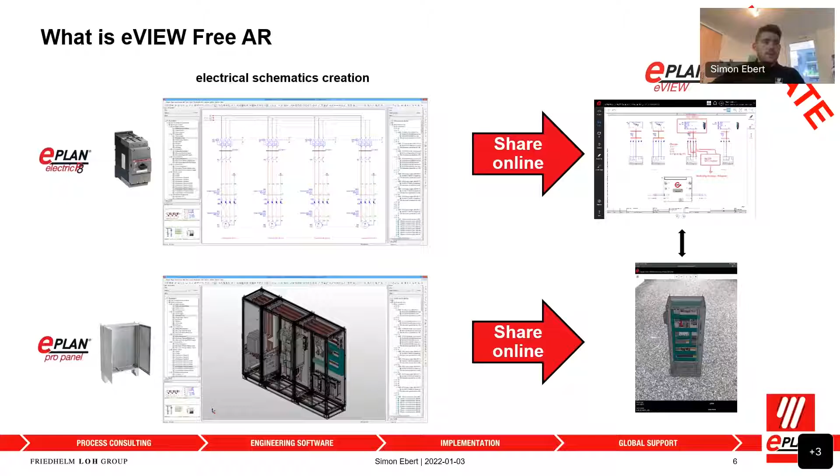This is an interactive 3D model. What it does is it lets you interact, select components, hide components, and all the stuff that wasn't previously possible in our whole eVIEW technology. Of course, everything that we learned from the AR technology will also be reintroduced into the eVIEW 3D viewer in just the future. So what we learned from AR, we also will apply to our whole cloud platform in just a couple of months.

What do you need to do to use eVIEW AR? As I said, we already have this 3D data available, so setting up eVIEW AR is quite simple. All you need to do is install one add-on into your Pro Panel, which in the near future won't be needed anymore since we'll include it into the cloud backbone. But currently, and for the next months, it will be needed as the first step.

After that, you simply upload the project like you do with your current cloud plugin, and then you grant access rights to everybody who should see the project. We are working in our whole cloud platform with user management from EPLAN behind it, so nobody who's not allowed to see your data will see it. You have full access to the user management to ensure only people with access can see the data.

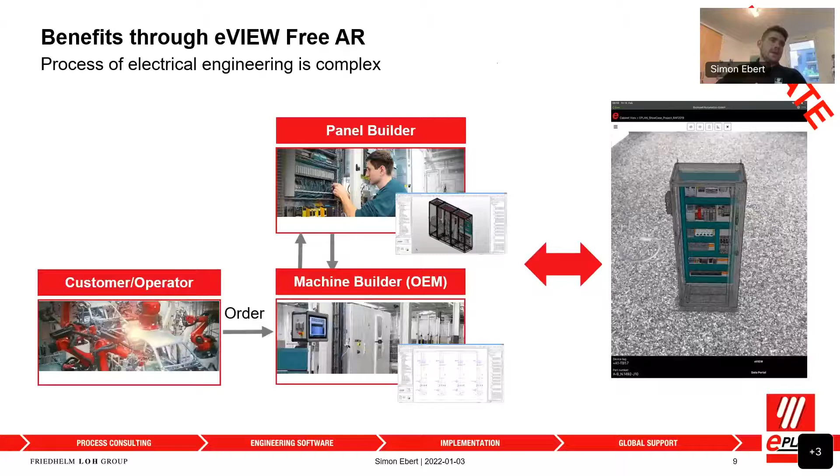And that's the whole setup - quite simple, 3 steps. I'm just going to quickly skip over why you should use eVIEW AR since I talked a lot about this previously, and I think I'm just directly going to jump into the live demo of what I did, to give you some better insights.

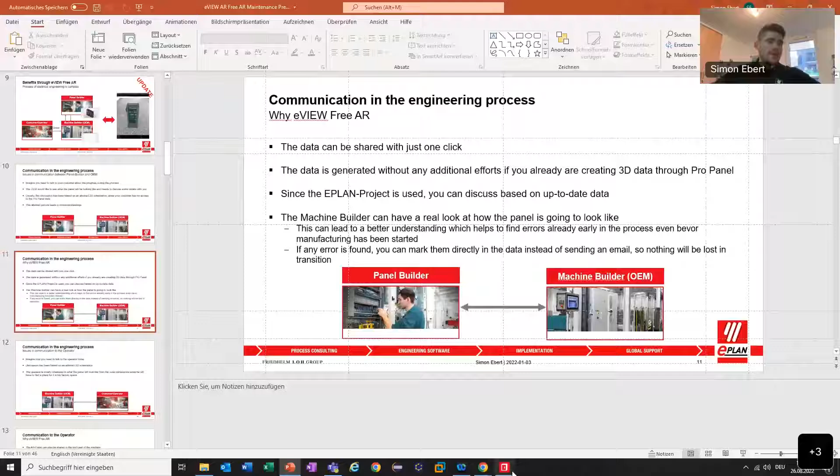What I did to start the live demo is I opened here my Pro Panel. You should be able to see it now. And here I have my project - it's a project we currently have in the building phase, also at the University of Aachen, so it's a real cabinet right here. And here I have my Pro Panel data.

What I do is I open my AR Services add-on and simply select the project in the page navigator. Here you can see I'm already logged into my ePulse organization. I have here my user, all my organizations, and if need be, I can also switch my organization right here.

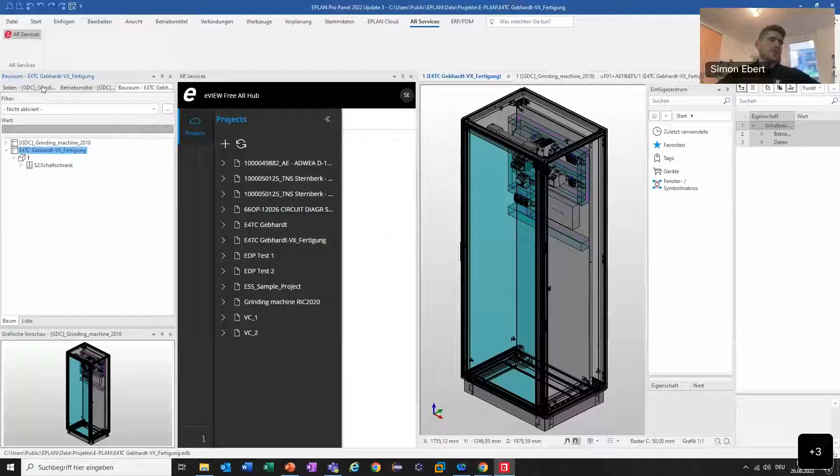What I want to do, if I want to upload the project, is just select the project in Page Navigator, right here. Then I click plus, and this opens a context menu where I can choose where to upload the project in the cloud context. I can put a comment and click OK.

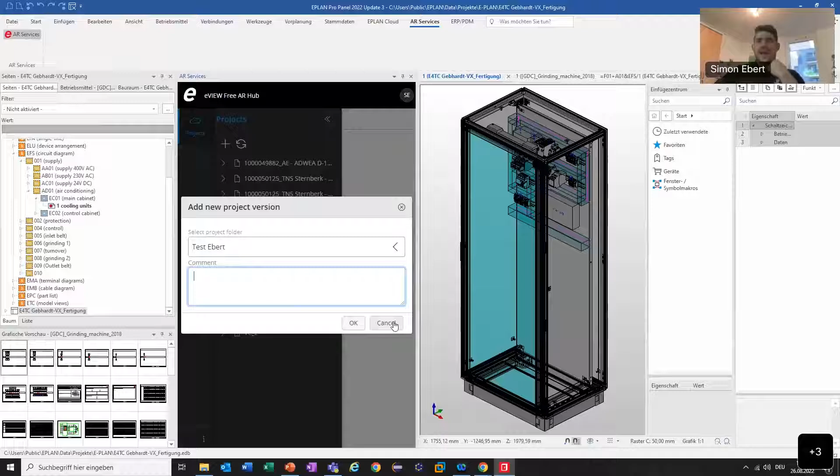Of course, in preparation for our meeting, I already did that for today. It takes 2 or 3 minutes, so I'm going to quickly skip over that part. Just so you know, it takes 2 or 3 minutes to generate the whole model and then upload it, and due to it being a 3D model, it might take up to 5 to 10 minutes. But in this case, the project is already here.

What I'm greeted with after the project has been uploaded is a project overview. This is quite similar to the view you already know from eVIEW, where you open your 2D schematics. I also have this available right here - if I open my cloud plugin, I could go into eVIEW, go into my redlining, greenlinings, and into the schematics in the eVIEW viewer.

So here I have now 2 options, at least when I'm on the cabinet. The first one is free AR, the topic we just talked about. Already I can see here a preview of the layout space that I've just uploaded, and I can, of course, hide the front door and interact with this.

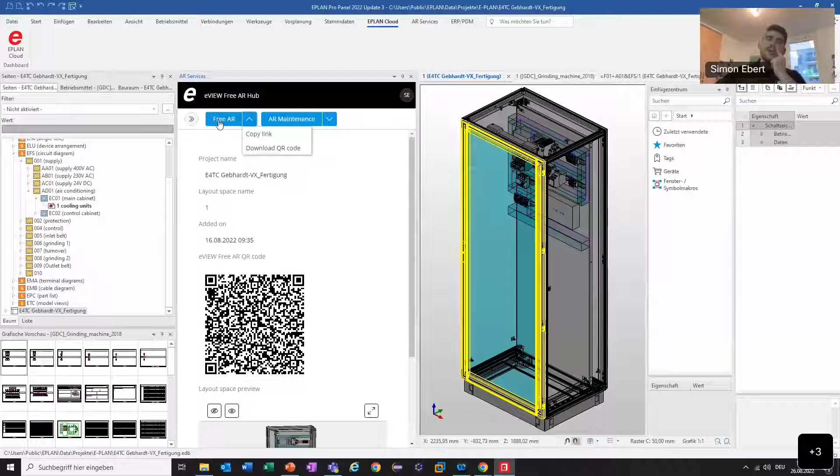And what I see here is a QR code. This QR code is basically just a link, and it's also accessible for download via this button here on the top side, the free AR button. Since it's a link, I can also copy the link.

It is posted into my clipboard, and now if I would like to share it with a colleague, I could either send him the QR code as a picture, or send it via email, which is what I'm going to do right now, with an email to myself. Via Outlook, I can share the link as well as the QR code. So I could go into my emails, create a new email to myself, and you see if I press Control V right now, it pastes the link that is directly connected to this very project.

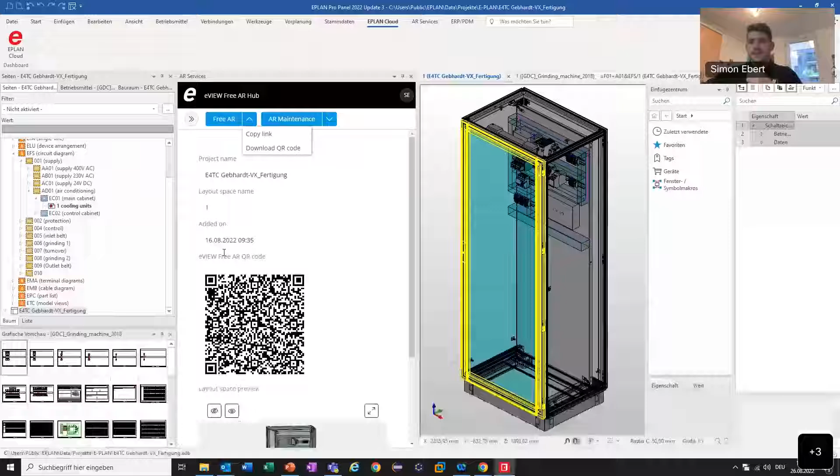What does this help me? This link I can access directly via my tablet. I'm going to switch now to the view of my tablet, since I want to show you how I can use eVIEW AR on a handheld device.

Can I ask you a quick question - whenever someone clicks on that, what capabilities do they have? Just viewing? Yeah, it's just viewing. And also, of course, you'll need the access rights in eVIEW and to authenticate yourself with your login of the eVIEW page itself.

Okay, Simon, how we display this AR, is that tablet only? Do we have wearables that we can use? What's our limitations there, if any?

So for AR, currently we are focusing on handheld devices. For this, I have a page that I'll refer to in the presentation where you can find all the prerequisites on the tablet. So of course you can't use it with a 15-euro tablet, but most actual tablets, mobile phones, and handheld devices currently can access the app.

I just changed the presentation mode over to the tablet, so I'm thinking that's how you have to have it in order to show something. Is that correct? Okay, so I'll have to reshare my screen if I do it correctly. It's the limitations of WebEx. Yeah, no issue at all.

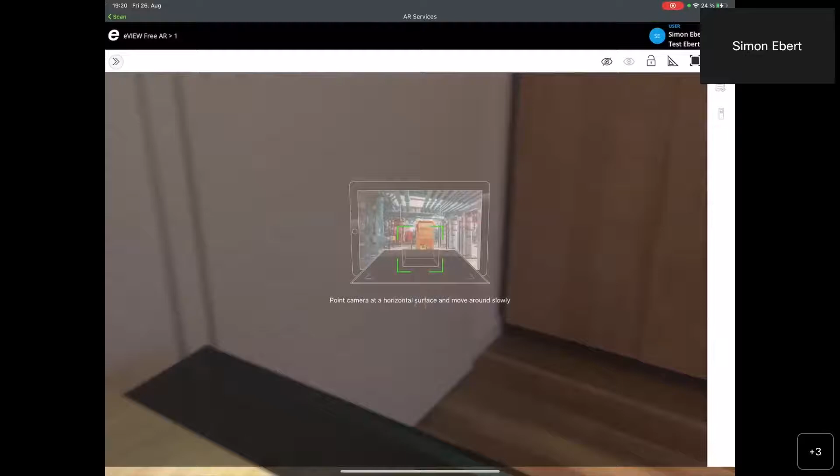After I've authenticated myself, now it tells me to point my camera at a horizontal surface to be able to place down the cabinet. I'm going to put that right here in front of my big cabinet that's in the background. And what you can see is right now in my room, I have the real size cabinet that I just had as a Pro Panel project now placed in my room.

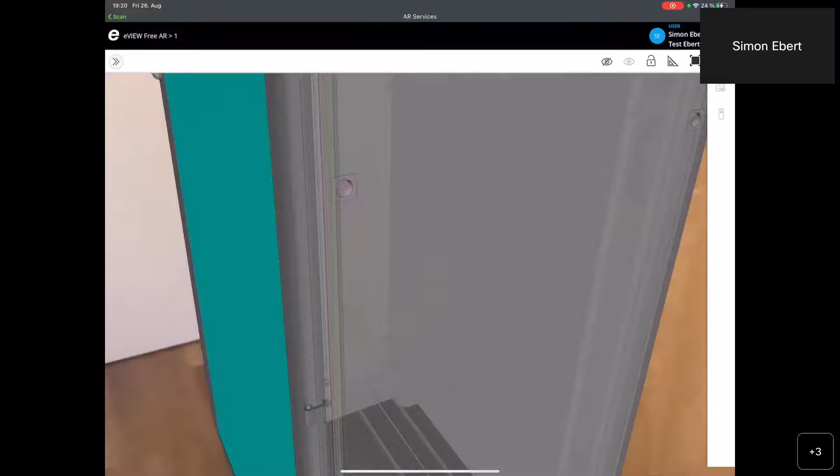Of course, I can more or less walk around it. And also, since it's AR and there's no collision with digital things, I can walk inside of the cabinet and view details on the components and stuff like that.

In case I don't like the size of the cabinet or the positioning, now with just the move of one finger, I can reposition the cabinet to the exact position I want to have it.

So let's say now I want to align it with this door on the background. I can simply drag it there with just one finger. And let's say now I want to place it sideways. With two fingers, I can rotate the cabinet.

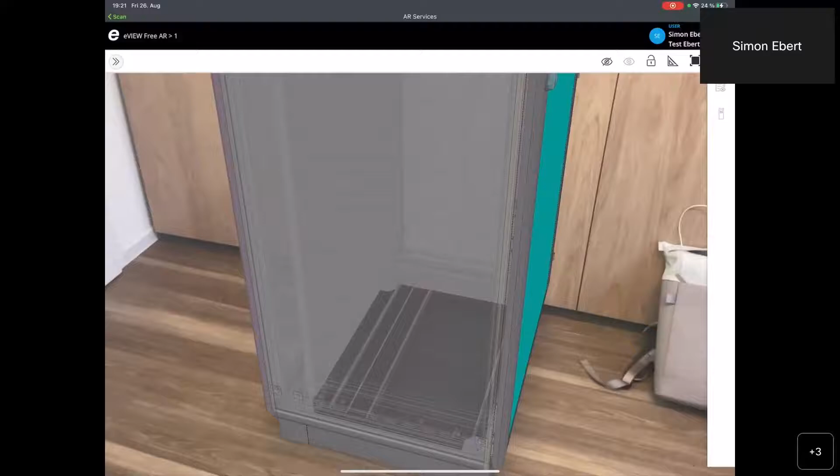I'm going to switch it back to the original position with the rectangle button on the top right, not the lock button, but the one below. This snaps the cabinet back to its original size.

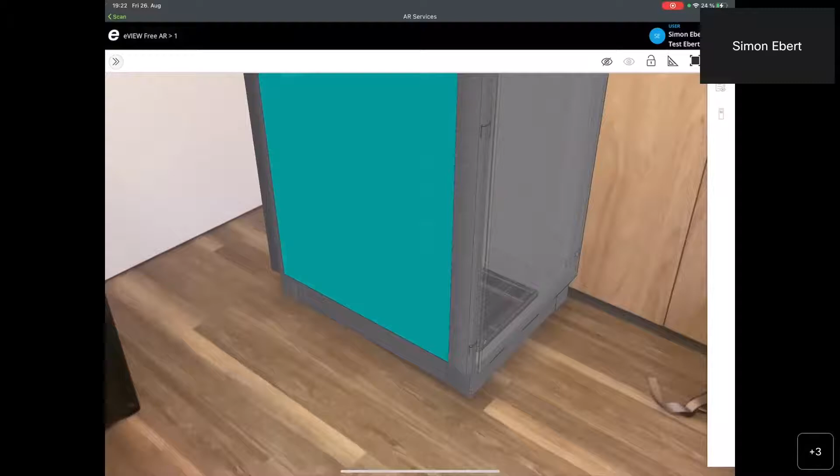As you can see, the cabinet is a little higher than me. Since I'm about 6 feet tall, and the cabinet has a size of 2 meters, and German doors are also around 2 meters, the cabinet has been placed in the exact real size. This is due to the application recognizing the size of the room I'm in, and being able, from the Pro Panel data, to accurately place the cabinet at real size. This will always be done whenever I place down a cabinet.

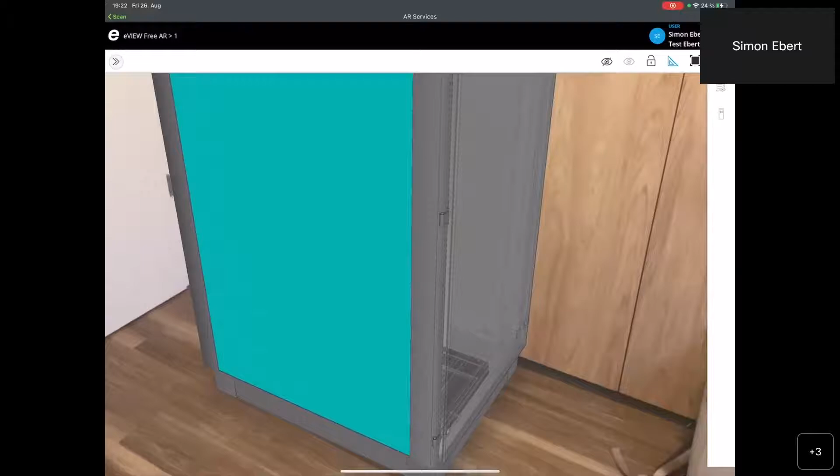But let's say I want to have a meeting and look at the whole cabinet without moving 5 or 6 feet backwards. What I can do is enable the ruler button on the top right corner, and now it's highlighted in blue. This enables me to use the function we all know from mobile devices, using two fingers to resize the cabinet right now. So now you can see I resized it smaller so I can properly see the whole cabinet and work with it.

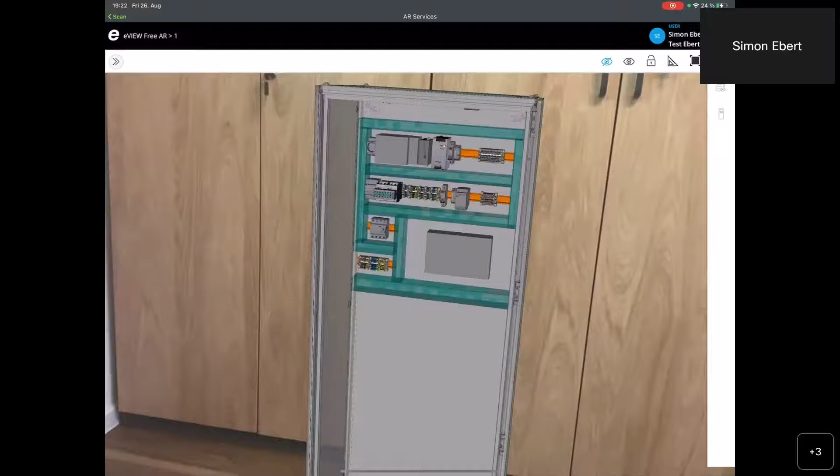After deactivating this function, let's say I want to access the insides of the component. So I'm going to switch into hiding mode using the eye-with-a-dash-through button and activate the function. Now, by just clicking the front door one time, it's hidden. You can see again I have access to all the components without needing to walk inside the cabinet. Here I now have some additional options.

If I want to find out what a component's name is, or its main function, I can simply select it and it will be highlighted in red. The rest of the model goes into transparent mode. And you see now on the top right side, two arrow buttons are enabled.

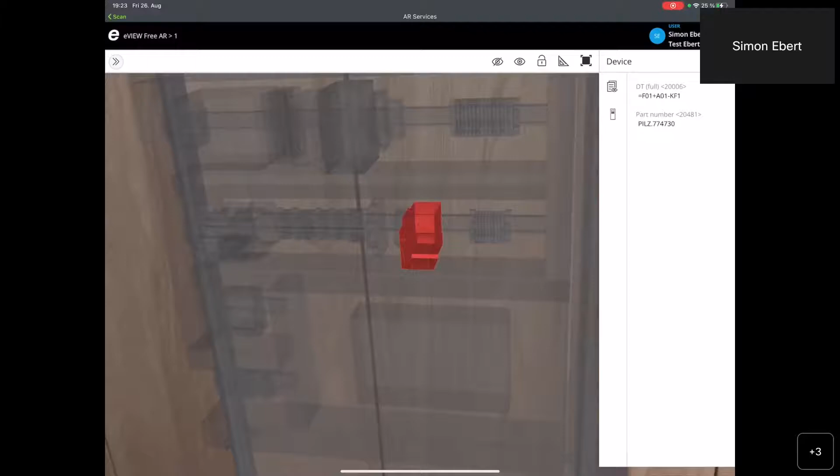When I pop it out, I can see all the information about the device I just selected. I can see the device tag, which is my motor protection switch in this case, and a part number. Since this data came from our Pro Panel, and Pro Panel is connected to the EDP, with one click on the EDP button I can pop out on the left side all the information directly from the EPLAN data portal, with the ability to download all the data sheets and find information about this component.

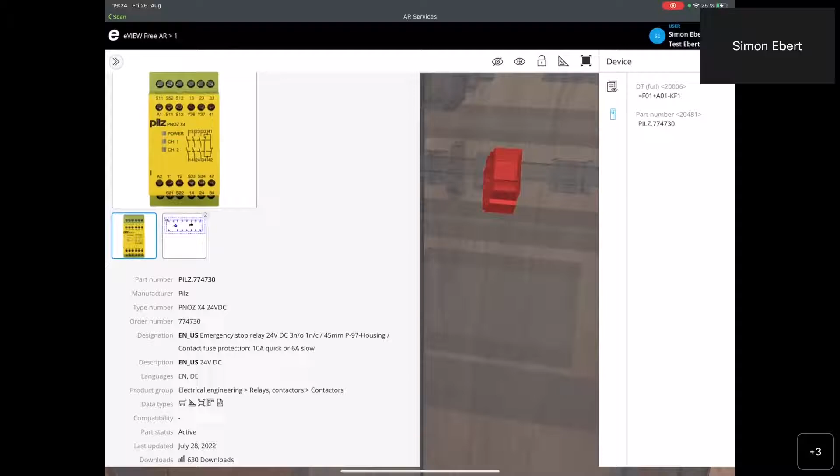Also, since we're working with the EPLAN platform, if I jump back, I can click on the eVIEW button you might recognize. If I do that, I'm redirected into my schematics inside eVIEW, directly to the page where the main function of this component is located. You can see I've been directed to page 42 of 57, where the main function of the component is located.

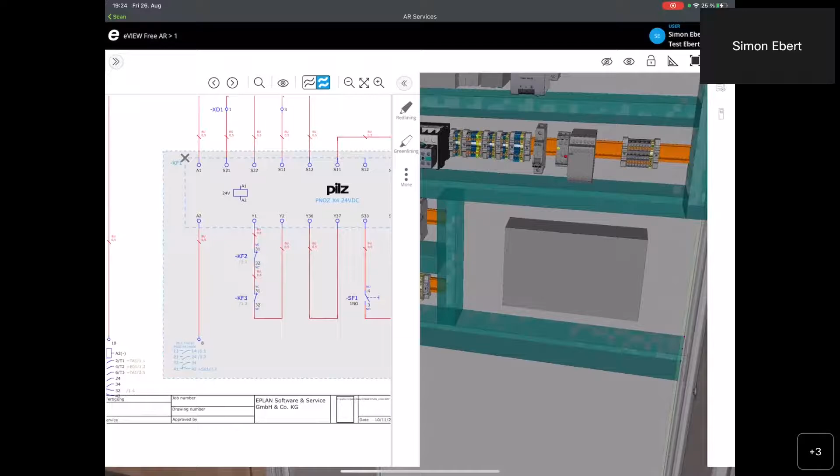Here I can find out how this component is connected and jump to any other component. Of course, now thinking about my AC example, I could also select the component and say, okay, this is now an AC, or I don't like this component.

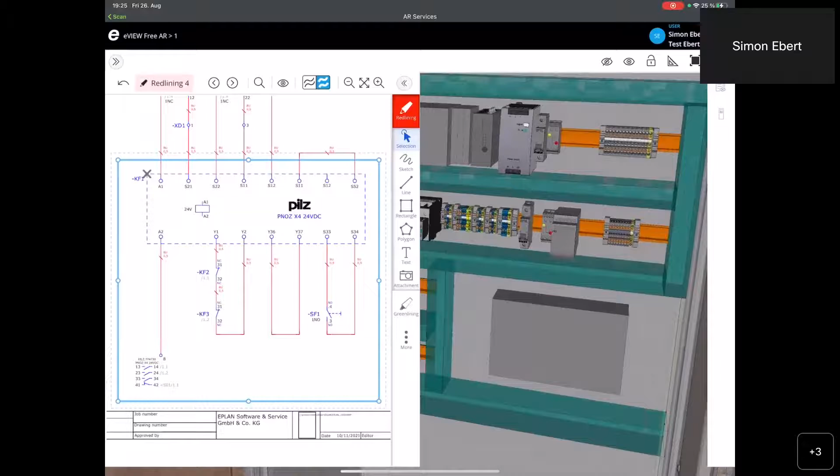So I can place down a redlining via a rectangle and say, I want to also attach a picture explaining why I don't like it, and insert text, for example, to give feedback to the engineer. This way the engineer will be notified in his EPLAN project, just like with the normal redlining of the normal eVIEW, since it's the very same function. So this redlining is also visible on my Pro Panel as well as in my eVIEW on my desktop PC.

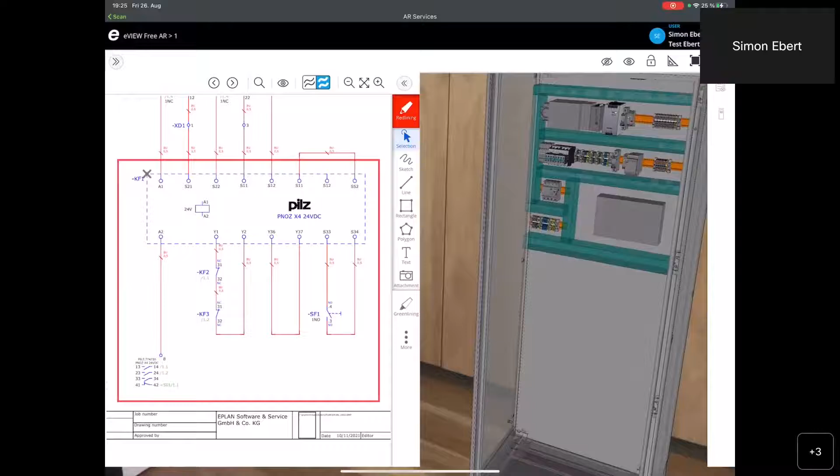This is the first iteration of eVIEW AR. I'm going to jump back to my computer and stop the presentation from my tablet to show you the second iteration we've just developed, which is currently in beta and will come within the next year, most probably.

Now Simon, while you're switching over, you got my wheels spinning as you started showing everything, and I'm thinking use cases. If I am a switchgear manufacturer using Pro Panel, can my customer lay down multiple panels in one room at a single time to view how that room would look before any manufacturing is actually done?

Yes and no. Of course, he can place down multiple cabinets, but they need to be inside of one Pro Panel project and inside of one building space in Pro Panel.

So whenever we're working in a Pro Panel context - let me restart my screen sharing from my desktop as a remark. Am I good to go for that? Yes, you should be good. Okay, I'm going to share the screen now.

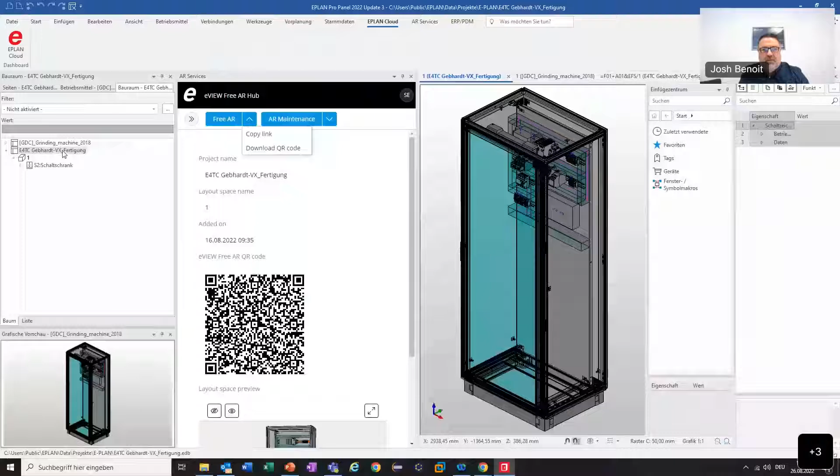Whatever I'm able to place down needs to be inside of one building space here in Pro Panel, and I can lay down whatever is in that building space in this case. Currently we don't have the possibility to display multiple building spaces next to each other, since each one has to be displayed on its own and needs to be able to access the data.

Now that we have that, you already saw I have a second button here called AR maintenance. We thought about not only using this data in an engineering process, but also this data, as we just saw, might be very handy in a maintenance process.

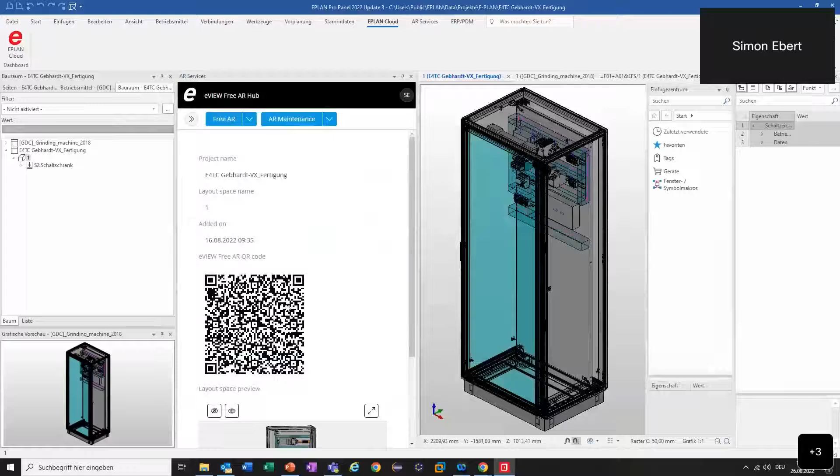What I can do via this button is download a different QR code. If I click here on download, I get a context menu that asks me where I want to save the QR code. You can already see it's a PDF document, and I'm going to show this document to you in just a second.

Let me switch to my desktop and to the data set I just created. So it's that one right here, and this is how the QR code looks. This is an A4 page. What can I do with that?

This QR code is intended to be placed on the front door of the cabinet itself. So I'm going to print this out. Whenever I print this out, I can place it on my cabinet, and this way I can overlay the AR data with the real cabinet itself.

Of course, unfortunately, since I'm stuck in home office and it's already quite late in Germany, I'm not in the office space anymore and don't have a real cabinet available at my home. However, for the upcoming presentation, let's just imagine my computer is a cabinet, and I want to align the top bottom left corner of my screen with the bottom left corner of the cabinet itself.

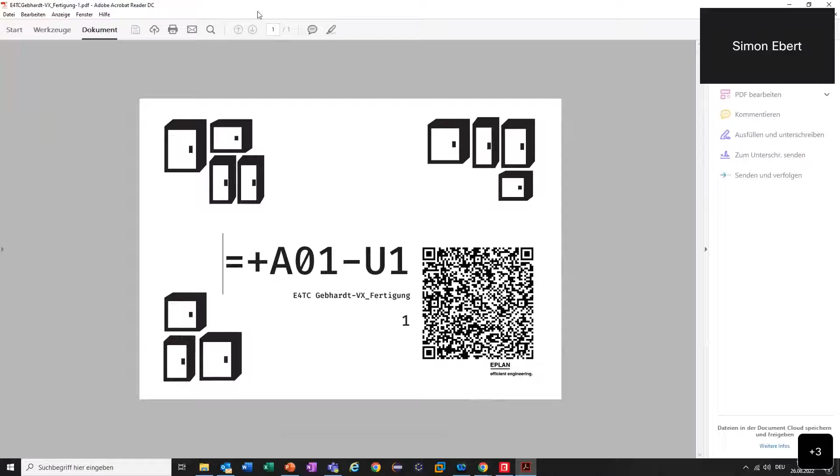Just for demonstration purposes, but it works the same way with a real cabinet. So what I'm going to do now is jump back from this screen to my tablet presentation, just to give you an overview of what I'm going to see now on my cabinet itself. One second, I need to switch to the tablet - it takes a while for me.

Let me ask you a question while you're doing that. Whenever you were showing how you could leave comments earlier - those comments that you leave, the person that has that QR code that opens that link up and looks into it - can anyone leave a comment, or is it just someone that is on the team?

It's just people that are on the team and have access to the data. Everything I do in this context is linked to my ePulse user, so whatever I'm doing, you'll see the comment was left by me, at this time and in this context. Everything I do inside the application is linked to my ePulse user and can also be traced back to this very user.

Yeah, I think security is a big question for a lot of what we do. So if anyone has access to it and they could leave comments, that would be something we probably wouldn't want. I just wanted to make that clarification.

Yeah, of course. So the access is always directly via the EPLAN platform or the EPLAN cloud. Whenever somebody has access, it has to be verified that he has access, and he has to have a certain password length.

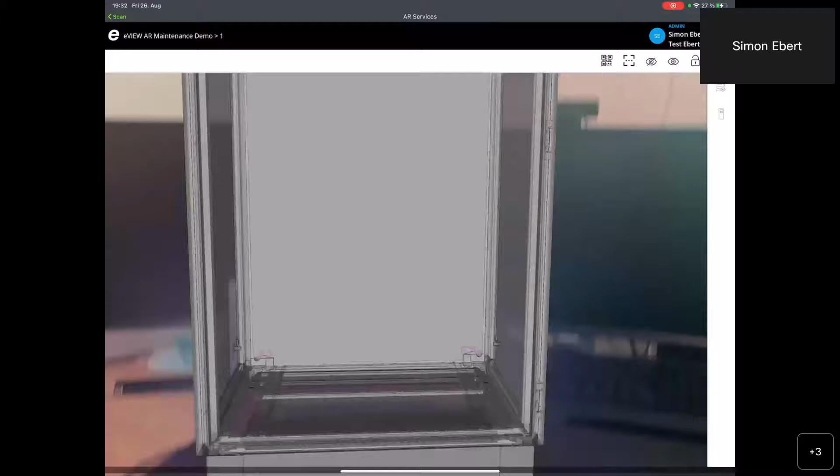Let me hide the front door again so we have a better view of what's going on. Now let's imagine that the bottom left corner of my cabinet would be the screen of my laptop. Since I just printed out the QR code and placed it somewhere on the door of the cabinet, I now need to align the QR code, since my application doesn't know automatically where exactly the QR code is.

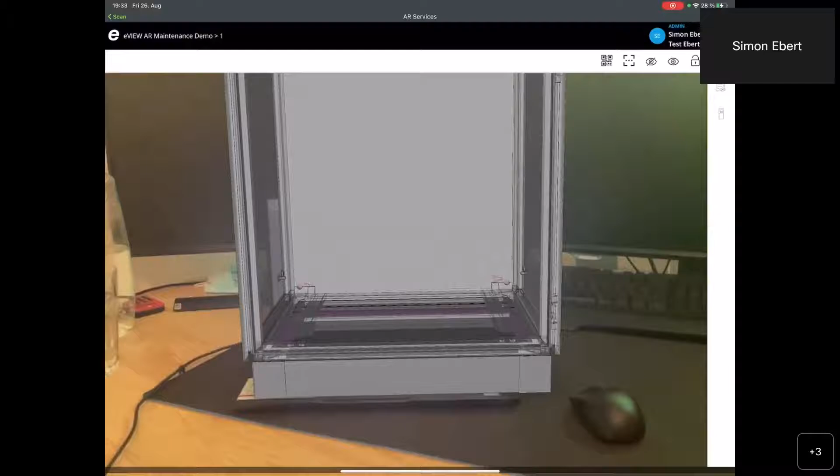For this, with AR maintenance, I have a function on the top right side again, where most of the functions are located, with this rectangle with the 3 dots in it. What that does is enable me to choose the location of the QR code on the cabinet.

So you can see I'll freeze my screen now through the lock button. What it enables me to do is choose the size of the sticker, since it's an A4 page, but in some cases there might be a border on the paper and stuff like that, so you can directly align the real size of the cabinet exactly to the size of your cabinet, and we have a little bit of wiggle room for how big the A4 page was printed.

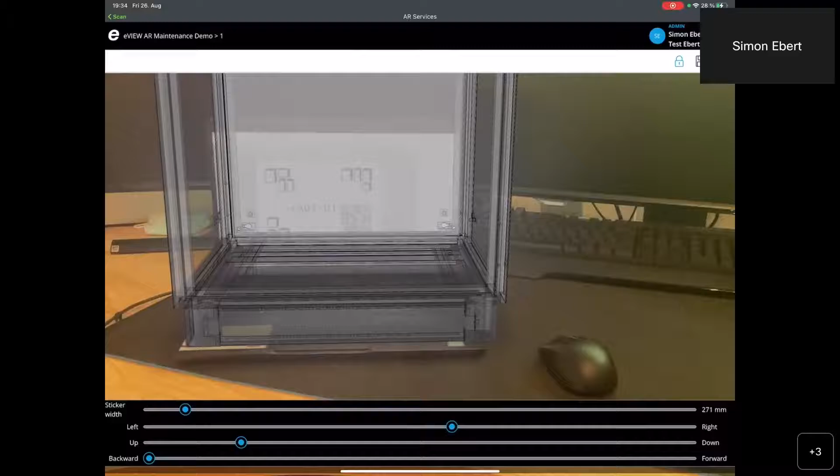Additionally, I can move the cabinet here to the left and right, and this way align the cabinet directly with the left border of my PC screen. I'm going to need to make it a little bigger. Now I'm going to align it to the left side of my screen. Also I can say my cabinet is a little bit lower, and let's say it's now a little bit more forward. This way I would align the QR code with the real cabinet behind it.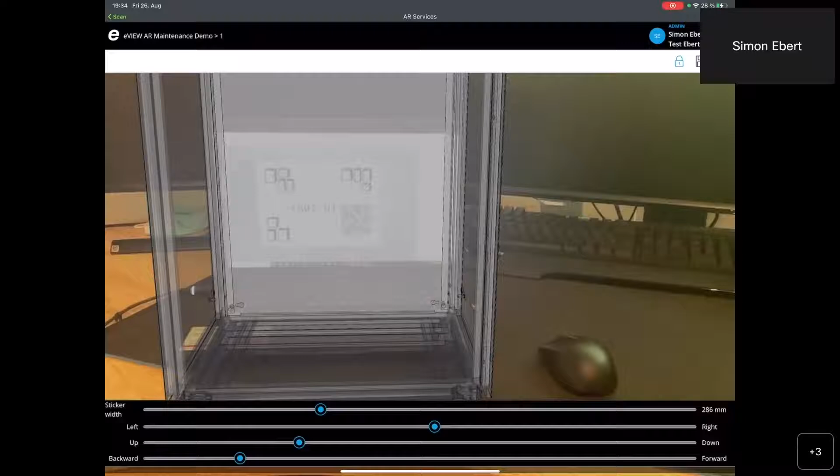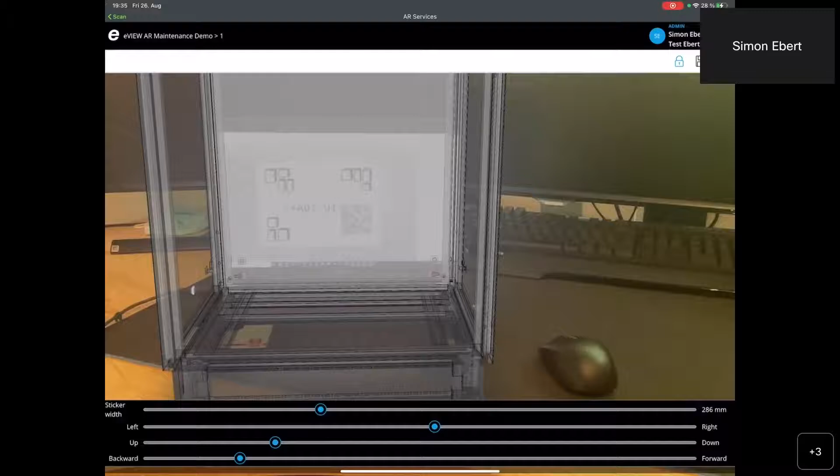Of course, I wouldn't see my laptop screen then, but the real cabinet, since everything is transparent and I'd be standing in front of a real cabinet right now. Now let's say I've printed it out and the sticker is placed on the cabinet. I don't want to go through this finicky process of aligning the cabinet with my AR model every time, that's why there's a save button on the top right. When I click that, in this case I'm not going to since it's a real cabinet at a real factory space I just fiddled with, it saves the position of the QR code itself inside of our cloud platform. So whenever somebody now accesses the cabinet, it will be placed at the very same position based on the position of the QR code.

So whenever I go to the QR code now and scan it, the cabinet will be in front of the real cabinet itself.

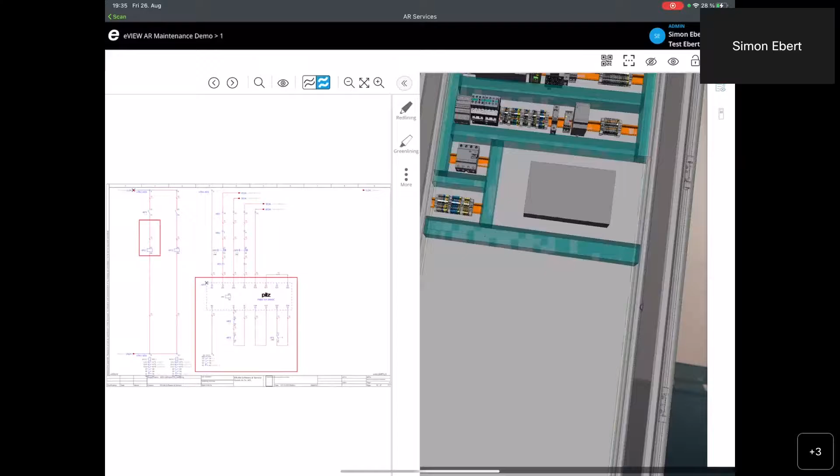Additionally, with eVIEW AR maintenance, I have some additional functions. So what we already saw is I can jump into my 2D schematics and say, now I want to find something out, and I can place down a red line.

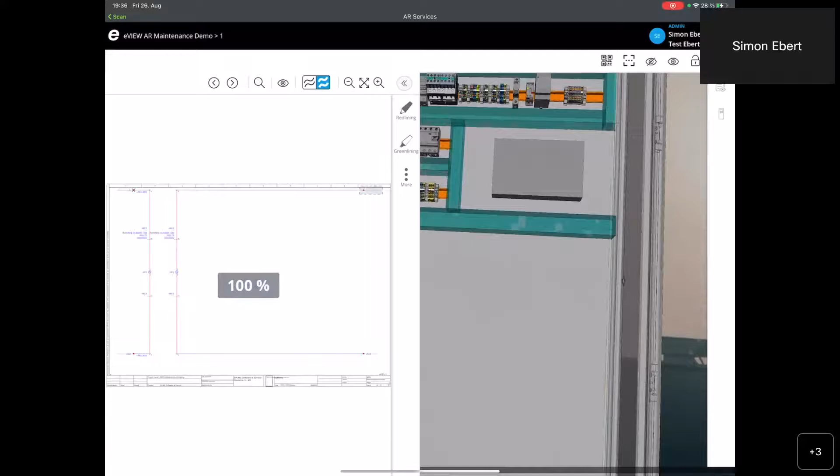Whenever I'm using eVIEW AR maintenance, I can also jump to a different page since I know from which component I came. I want to locate my KF2, since I have a maintenance case and realized no current is coming to my motor protection switch, and I want to locate this very component. I can select the component itself, and whenever I have AR maintenance enabled, I can click on more and say open in AR.

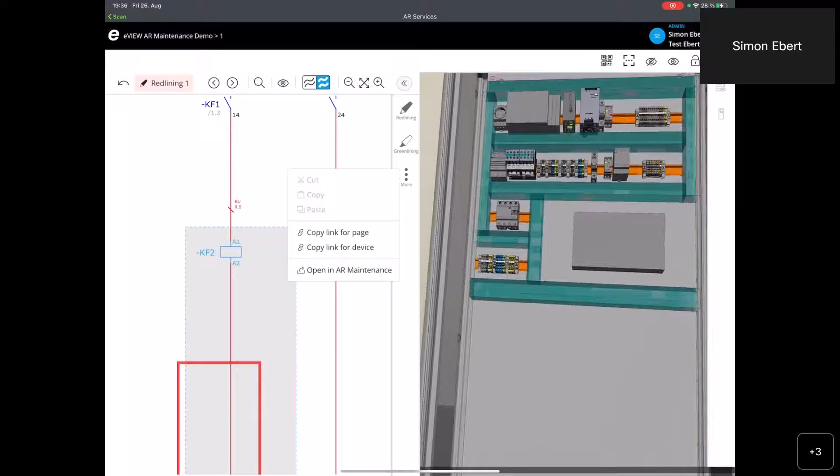This highlights the component directly in my 3D spacing, the other way around. This way I can locate this component and say, okay, the problem is not here. So I'm going to jump back into my 2D schematics.

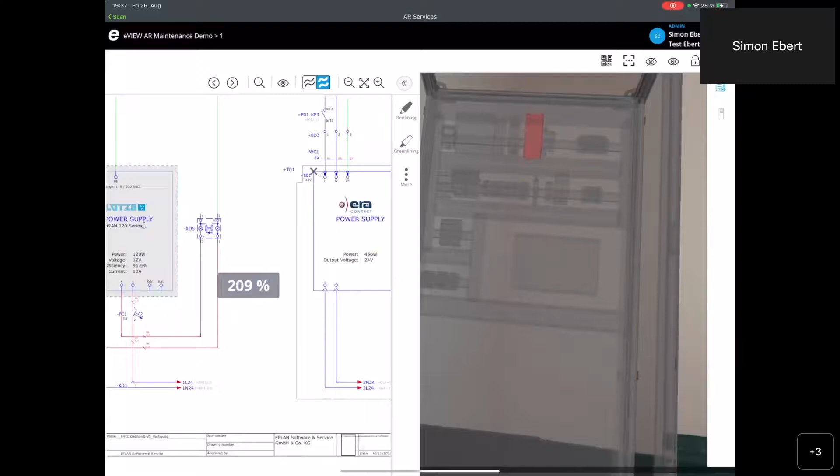This also is not receiving any current in my example. So I'm going to locate, let's say, the power supply, and I want to locate that one. Again I can click on more, say open in AR, and the power supply of this component that I just came to through my connections is highlighted in red for me.

This way, I have a really easy way to do maintenance processes with the help of AR. This way, I can really easily locate components inside the cabinet.

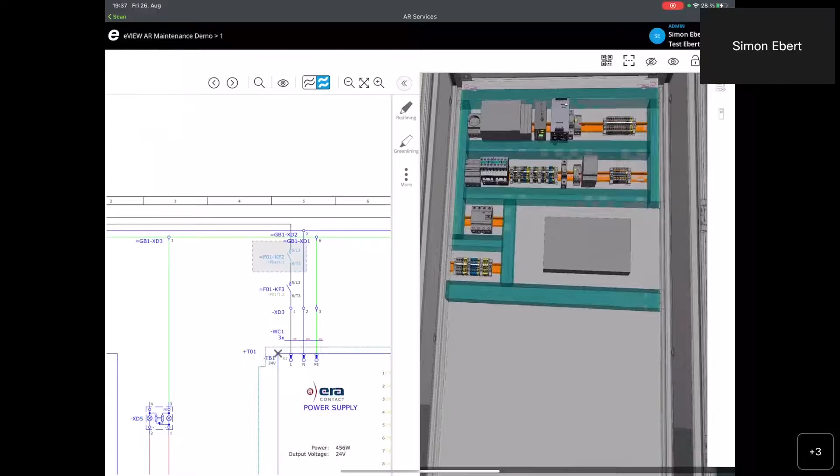And also, if EPLAN or EDP information is available, I can pop out my EDP information on the right side. For this I just need to switch to a component that is actually in EDP. So for this one, I'm able to see all my data sets and download the page to see what replacement part I can use, or what accessories on the part are able to be used to repair the component itself.

And Simon, I believe you mentioned there's futuristic talk of our customers using routing in production, that we may be able to highlight the entire circuit down the road. Is that true? Did I hear that correctly yesterday?

Yeah, that's correct. So in the current AR model, and that's the issue with the presentation I have possible right now, there's two basic issues. The first one, I'm just going to mitigate by showing you some pictures of what it looks like in a production space. You want me to change your presentation mode to the other one? Yeah, please change back to my computer. So that I can share what it will be looking like on a computer itself, on a project itself, on a real cabinet.

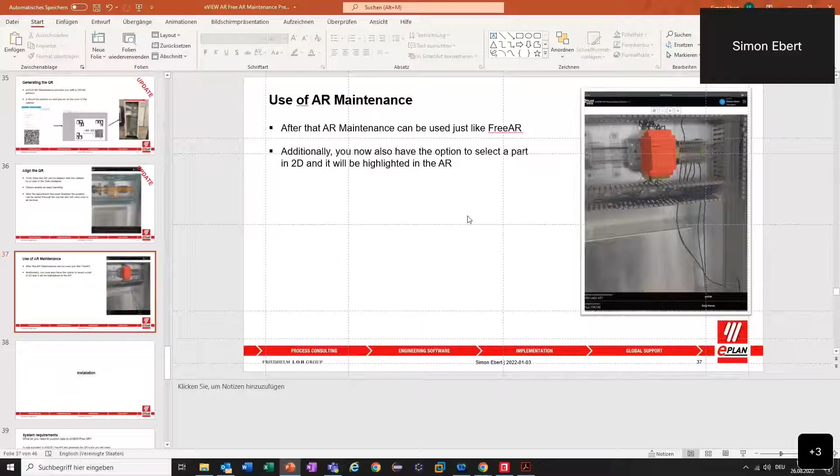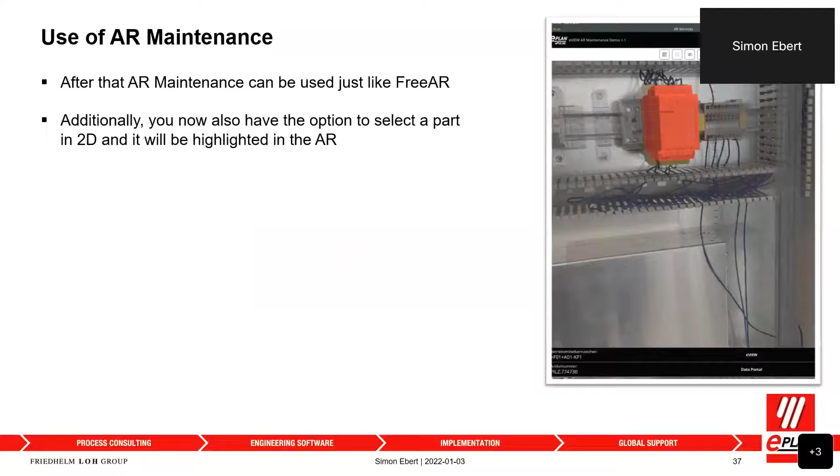Are they going to send you a cabinet? Seriously? Yeah, to be honest, I'm going to get a Rittal panel in the near future into my home office space to be able to present in the evenings some things to some customers, especially since we're really limited on working in the German space right now. Whenever I want to present to you guys in the US, I need to be able to do it from home as well, since I think our office closes at 7 in the evening.

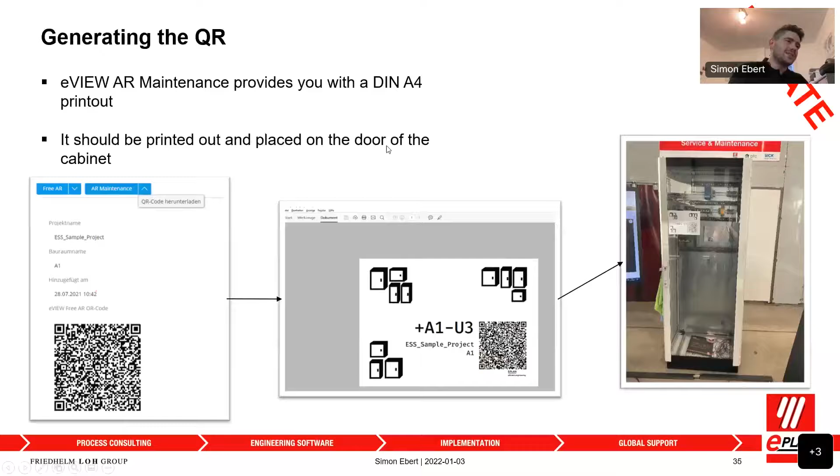So yeah, this way I'm also able to show stuff like this in the evening. So again, here's some pictures for you of what it looks like when I'm aligning the cabinet. For the whole picture, you can see I've overlaid it on top of the real cabinet. This is also, as a remark, the cabinet that we just saw in my presentation.

So there is a real counterpart of this very cabinet that we just had a look at. It's located at the University of Aachen in Germany, where we more or less started developing this whole technology.

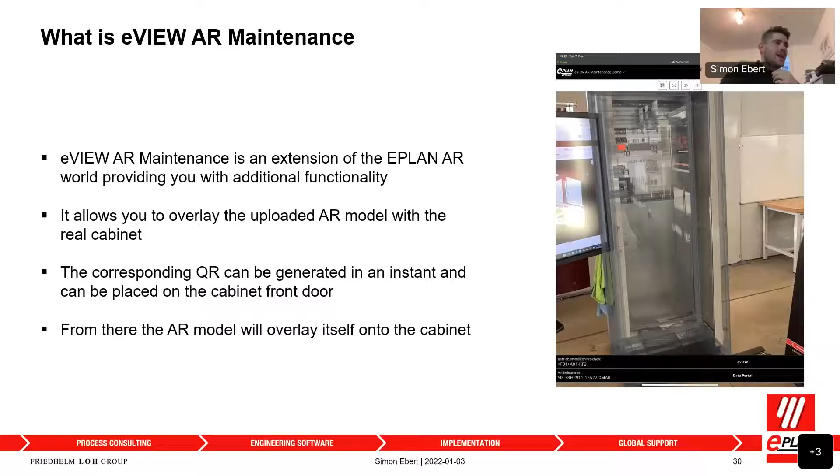The second thing I'm going to quickly share with you is what Dallas just asked. I only have this available as a mock-up, but in my development environment we have a newer 3D model that also includes the stuff I already told you about. Let me use this project - here we have the 3D viewer that I just teased, also in our ePulse.

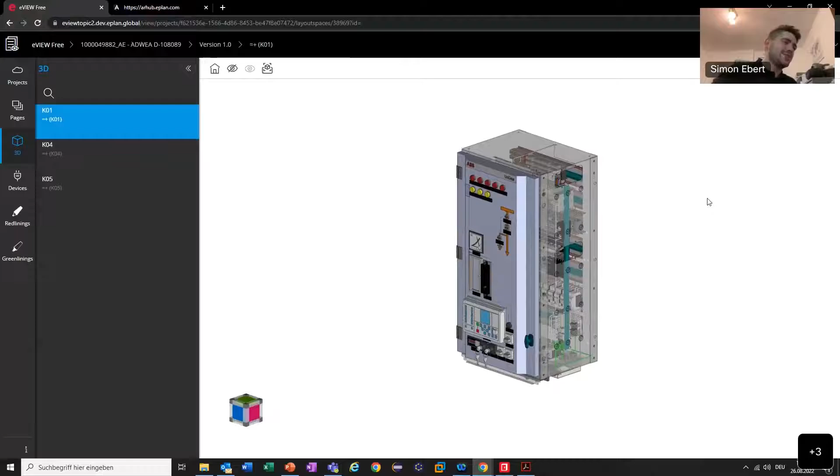In the eVIEW, in the EPLAN Cloud, I'll have access in the near future to the new 3D viewer where you can see the components are quite more detailed, and I will have all the availabilities of hiding components here in my EPLAN Cloud 3D viewer as well.

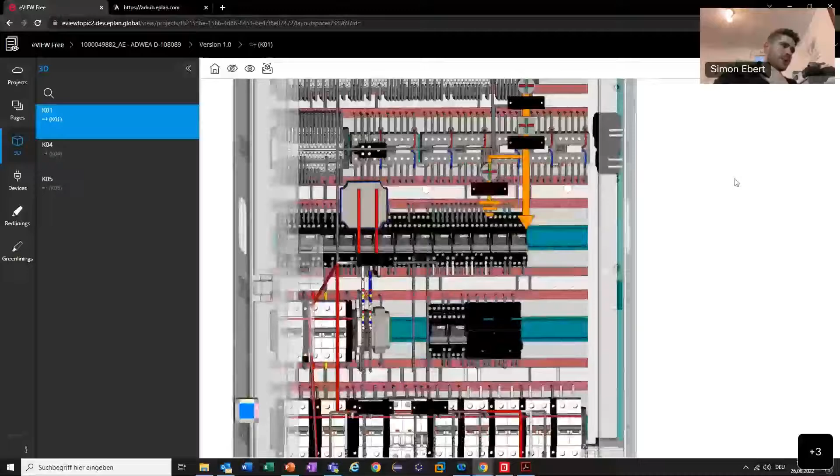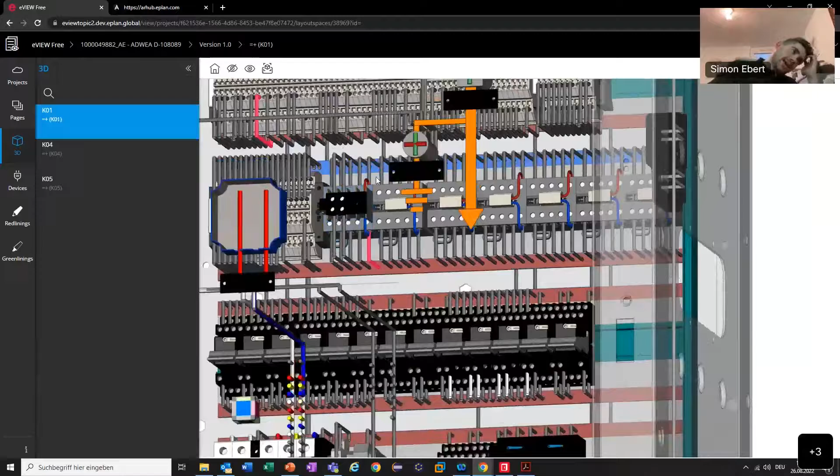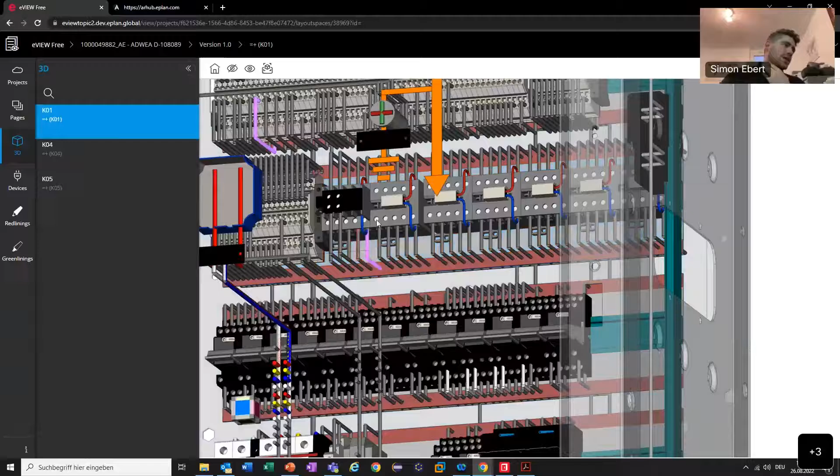These wires then will also be visible in the AR project. The only reason it's not there yet is that we are fine-tuning this functionality, since back in the days it didn't work as well as it does now - that's why I'm able to show it. But we had massive issues being able to select the wires, especially really thin or really thick wires, since they were just blocking everything. Now that we figured out a way of working with it, we'll be able to shortly release this function and give you access to the new 3D model that will be inside the eVIEW cloud.

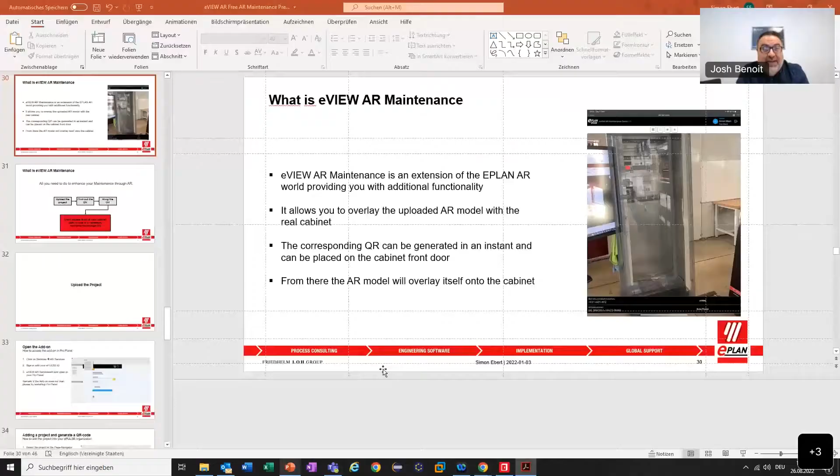That's amazing. For someone who gets to work with pretty things and designing for marketing, this gives me something really to work with in the future. And it's time for me to get my hands on one of these too.

I know that you're getting a cabinet. I feel like I should get one and maybe make a top hat for it, like the TARDIS, because that's what I modeled this whole thing around. Some people might not have watched Doctor Who growing up and don't know what the TARDIS is - it's the phone booth from Doctor Who. So that may be a little out of your age range, Simon. For me it's a little too old, but I still don't know it for a fact.

Some of our listeners today might think, okay, I want to try this out for myself. We have this available in our ePulse community. Whoever has access to our eVIEW cloud or EPLAN cloud might recognize that every user is enlisted. If I jump back into the real cloud, just give me one moment - here is my real ePulse, here I have my eVIEW. Everybody might recognize there's an organization called EPLAN Community, which everybody is enlisted in, and it's a demo organization where you can have a demo of eVIEW and view our ESS sample project. It's a project consisting of 7 layout spaces that you can have a look at and use as a baseline of what an EPLAN project should look like.